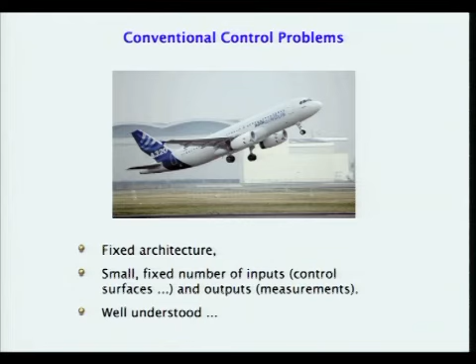I worked for a few years on designing control systems for aircraft when I first graduated. Typical control problems have a fixed architecture—an aircraft to be controlled, a small fixed number of inputs like the control surfaces on the wings and the thrust of the engines, and a small, importantly fixed, number of measurements like accelerations and angular velocities. I think these sorts of control problems are now well understood.

Have we got a pointer? Is there a... oh, okay. Oh, a physical pointer, right. Okay.

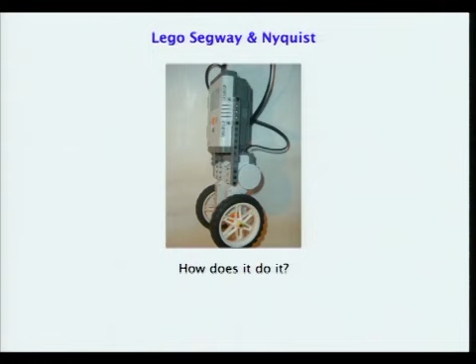So why am I talking about this? We had a bit of economics 101 in the previous talk, so why am I doing control 101? Well, to try and justify - a lot of this talk is going to be about linear systems. So why are linear systems interesting? Clearly, power systems are nonlinear, so shouldn't we just ignore linear systems theory? Well, I don't think so, because I think you can still get a lot from linear systems.

Let me continue that justification. It's one of my favorite toys, and my kids' as well, and the engineers' and the Cambridge undergraduates'. I use this in Control 101 - it's called Paper 6 in England - to demonstrate feedback. It's a simple Lego version of the Segway.

If I turn the controller on - I've got a little PlayStation controller here, so I can make it do things. Bit of a small stage for it to operate on, but hopefully it means you can see it. So it balances, and it's made out of Lego. So how does it do it?

This is actually how I start the second year introductory control course, getting students thinking about how that's achieved. I think to most people here it'd be pretty obvious, but I give the students options - is there some sort of complex logic going on inside that detects if it's being pushed and leans against it, and things like that? So if it hits a disturbance, does it fight back? Is there loads of code with if-then statements inside? Well, no. The actual code is pretty much one line.

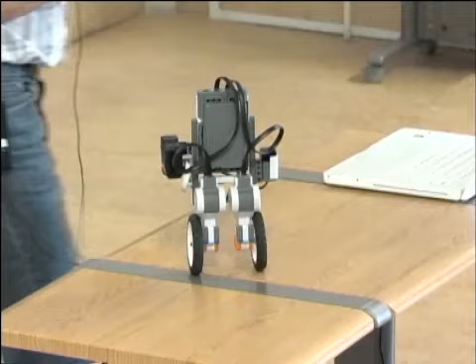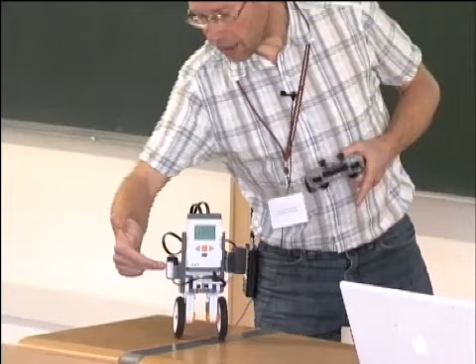It's just that the power into the motor - there's a couple of motors here - is a linear combination of the angle that the wheels have gone round, the angular velocity of the wheels, and then there's a gyroscope here. On the end there's a rate gyro, measuring the angular velocity, and that's integrated up to give an angle.

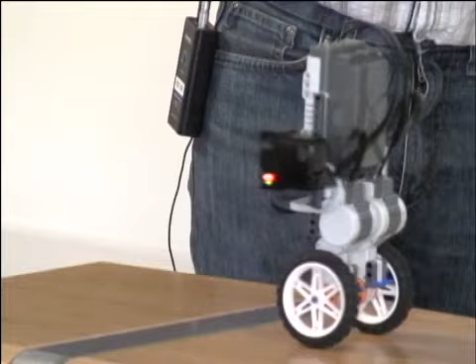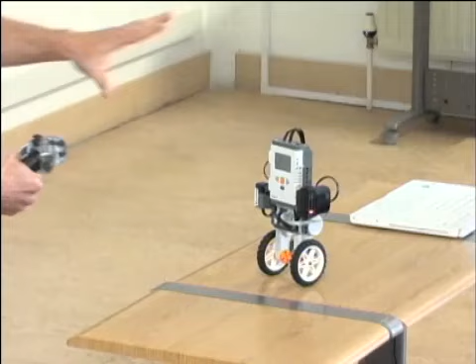So very simple, linear feedback. Linear feedback does work, even though the system itself is clearly nonlinear. It's Lego, for goodness sake. It wobbles, and it's not particularly rigid, for example, and the motors are highly nonlinear. However, the numbers do matter.

If I change - I don't know how I stop that thing coming up, but. Does anyone know? I don't normally present with this. Does anyone know if I can get rid of that?

If I change that 0.35 to a 0.55, then it doesn't work. Very small change, yeah? 50% or something.

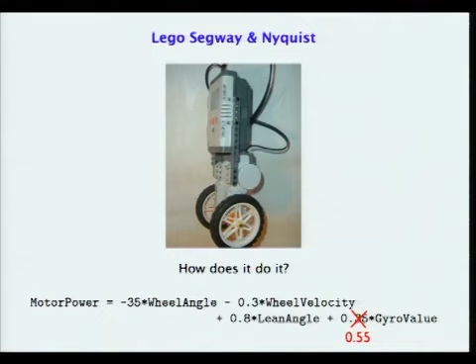When I was designing this, I initially thought it'd be easy, because we've got inverted pendulums in the department, and I thought I'd just throw the thing together, pluck out some numbers, and get it to balance. I'm a control engineer, I've been doing this for years, sort of thing. But I couldn't. I spent a whole day on it with my son and just couldn't get it to work. So I ended up having to get the ruler out, measure it, put it on the kitchen scales, estimate moments of inertia, and then produce a differential equation and do it properly.

But it works. It's a simple linear feedback, and this is often the case with linear feedback like this: when you've got it right, it's incredibly robust. I mean, I picked this up - this was in bits last night because my son had various bits of it in different models. I couldn't find most of them, and he'd gone to bed by the time I got home last night. So I had to get the bits out this morning, threw it together, put the software on, and it works. So it's robust, but the numbers are important.

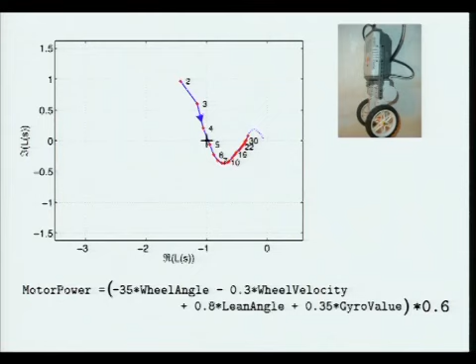And if I turn up the gain any higher, the oscillations would build up, and it would go unstable. If I decrease that number so the gains are all 60% of what they were before, then this curve gets smaller, and -1 pops out the other side of it. I've chosen the gain so that -1 is slightly outside there, and it predicts an instability of around 4.5, 5 radians per second. And that's this one, I think.

So it's only just on the edge of instability. It may or may not go, depending on what the temperature is and things like that. The model does change, and how long the motors have been running for - the characteristics do change as they've been running a bit. So it's not very good.

Right, so the final point about linear systems: even though power systems clearly are nonlinear, and a lot of the interesting characteristics in power systems, like cascading failures, are very nonlinear things - well, so is this thing falling over. But the prediction about it was linear.

If you've got - imagine you had 100 of these - there is a sort of analogy, because it's linear, if you push that over too far, it will be in the nonlinear range, and it's likely to fall over. That's right, but whether it gets into that nonlinear regime depends upon the underlying small signal linear stability.

Yeah, no, I was just going to say - imagine you had 100 of these in a room, all trying to keep a certain distance from the one next door, which is pretty much like a sort of power systems network. And then you're interested: if I knocked one over, are they all going to fall over? So that would be the sort of cascading failure.

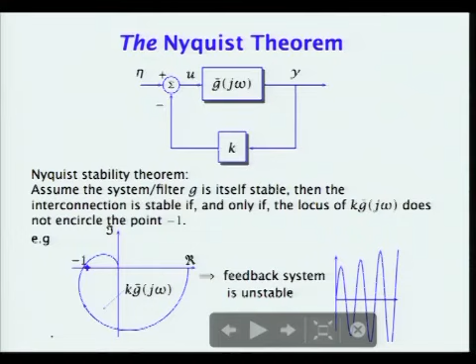So the feedback loops are products of two G's. So to go around one of these loops - the input to G2 is, part of the input to G2 is the output of G3, and part of the input to G3 is the output from G2. So to go around a loop, I've got a product of G's there.

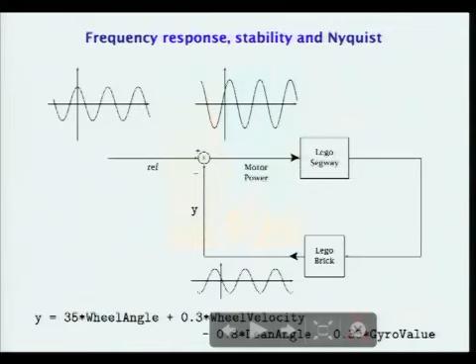And so yeah, the theorem is that I take those products and I find something which is a bit bigger than the convex hull of the products here, where I keep the I fixed and I vary the K over the systems it's connected to. So this is all the sort of pairwise interconnections around, say, for I fixed. Take this thing, which I call the S hull.

But notice this is an entirely decentralized condition, yeah? In that you take this, forming these hulls here, you do it frequency by frequency, yeah? So it's not necessarily too conservative, you just take one frequency. You index over the system, so you go through - system I just needs to know the frequency response of the guy he's next to.

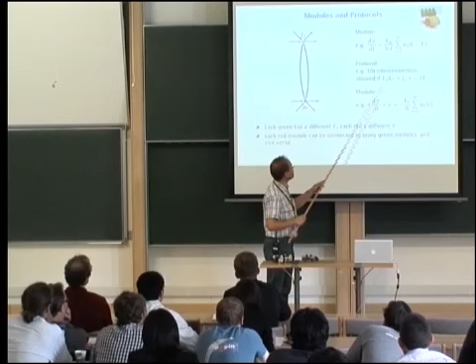And the only condition is when I add a new thing on, it will be bound onto one existing brick. When I add a new thing on, it's got to satisfy those rules. And it turns out that you can prove that any system you get following that process is stable.

Yeah? And there's a graph. This is just looking at these S-hull things, frequency by frequency, and taking the convex hull, which is that red curve there, and that doesn't go around -1. So anything you get by doing this, any interconnection you get, any network you get by following these rules is guaranteed to be stable.

Now, it's a toy example, but I think it's still fairly powerful, because I know no other way, even for that simple system - it was just first order dynamics at each node - I know no other way of proving stability. I don't think. I mean, we spent some time looking for Lyapunov functions and things like that, other ways of approaching this problem. But I know no other way of proving that putting these things together, you always end up with a stable system.

The details ought to give a hint for this audience. So when we take the Laplace transform, I had jω there before for the sort of harmonic response operator. Got S there instead, but it's the same object. So these are the equations I gave.

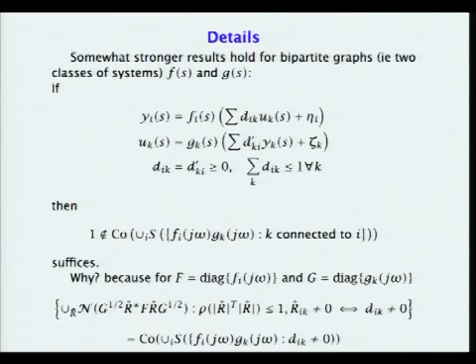So this started with looking at internet, where it was quite successful. But let me go on to power systems. And the question is, does this apply? I said there's no, don't get your hopes up. Basically, the internet was a lot easier than power systems. So let's just talk a little bit about power systems.

So power networks are the standard picture, as Sean mentioned this morning. If you've just got generators and passive loads connected together, you've just got a bunch of springs and masses with a bit of damping. So inherently, they're only marginally stable, or close to marginally stable.

If you start, as soon as you put voltage regulators on at the generators, then they're very easily destabilized. And stability is then introduced, the standard picture, by putting on power system stabilizers and flexible AC devices like static VAR compensators.

So an example, just to talk about these terms, an example that's been well looked at is this simple 4-generator model, a benchmark that Kundur has in his book, and there's a previous paper, where there's 4 generators, 2 closely coupled here, 2 closely coupled in another area over there, with a connection, a long distance weak connection between them.

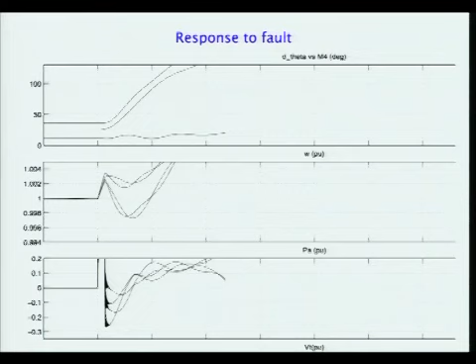Yes, and this is with the voltage regulator put on for one particular configuration, one particular scenario where the thing goes unstable. And then if you put, this is a standard little example, you put the power system stabilizer on, and for the same faults you get stable behavior.

So the question is, well, let's just go on a bit first. How are these things tuned? I'm aware there are people in the audience who probably know a lot more about this, or about practice, than I do.

But as far as I can ascertain, these stabilizing devices, whether they be the power system stabilizers as here, or SVCs or other electronic means, these things are tuned as part of the commissioning process when you put a generator in, or a line in, and may be tweaked with time. But basically, they're very much like the controllers that I was designing here. Controllers have been designed on the local machines to get the thing working at the time that it's connected to the grid.

But there's an obvious issue there. I mean, the network changes. So when you start adding new bits to the network, you might have to go back and change the parameters of the model.

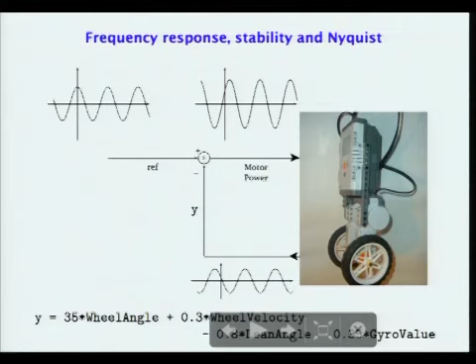We're talking about how far do I have to go back? Yeah, a long way back. No, these sorts of things—where there's still an interaction between that guy and that guy, of course, it's just coming via that. All I'm saying is that mathematically, I want to be able to write it in the way that captures those interactions.

Well, the thing about power systems is that everything is connected to everything else. If you constrain your connections only to the neighbour, I think it's too strong an assumption. The electromagnetic forces link all the generators through the whole system, and the interaction is not only through the neighbours, it's through everything else around it, and the way those controllers are tuned. You're right, they're tuned on a decentralized basis, but they're tuned assuming a certain security margin so that the whole system is stable.

So basically, those kinds of things were looked at very well in the 80s when the first instability phenomena were discovered, and by the 90s I think the theory had been well developed on the whole thing. I disagree, I don't think there is any theory, apart from—well, also you mentioned you've looked at Lyapunov functions. There was the whole theory of energy-based Lyapunov functions developed based on the so-called equal area criterion.